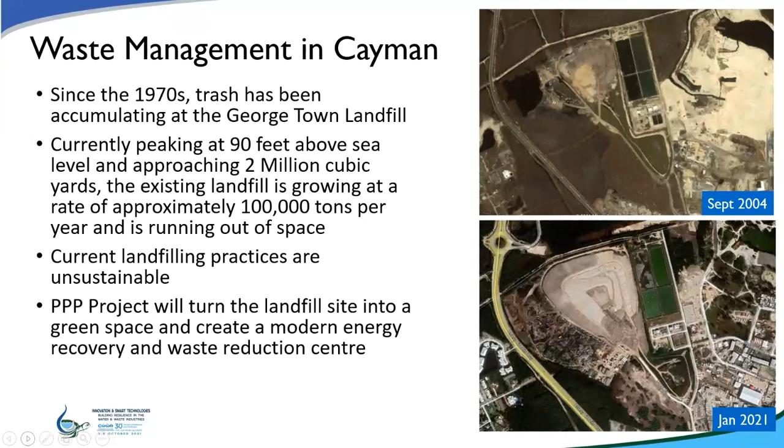The current waste management strategies on Grand Cayman include setting aside yard waste for mulching and separating scrap metals, including end-of-life vehicles, scrap, and appliances, for future processing and shipment overseas. Infectious and pathological wastes are incinerated through a batch-loaded starved air combustor with a high-temperature secondary combustion chamber. Plastics number 1 and number 2, fiber, glass containers, tin and aluminum cans are collected in dedicated containers at several recycling depots located throughout Grand Cayman near shopping centers and grocery stores. Still in its infancy, the recycling depots currently process about 1% of the waste volume for shipments to overseas recycling firms.

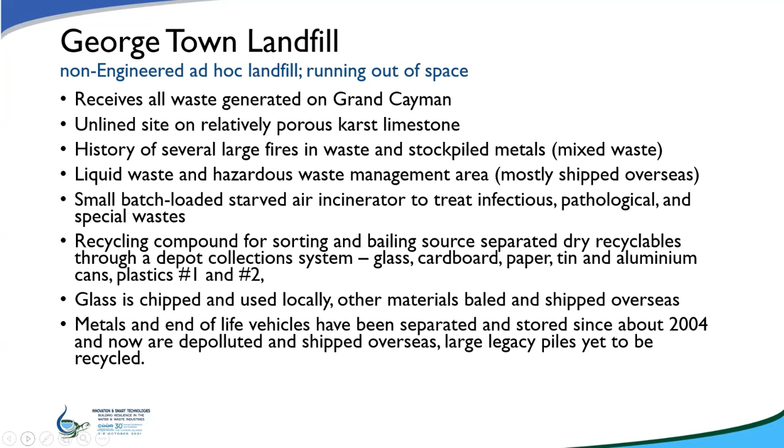When developing a waste management system, one cannot overstate the importance of sound waste volume and composition data. This is particularly true when developing a system that includes an energy recovery facility, since these facilities are designed based both on the waste tonnage and the calorific value of the waste. The government implemented a waste composition study in June 2018.

In the absence of potential third-party waste, optimizing the facility size for a 25-year contract period is difficult at best. A fine balance must be struck between short and long-term capacity with capex and affordability.

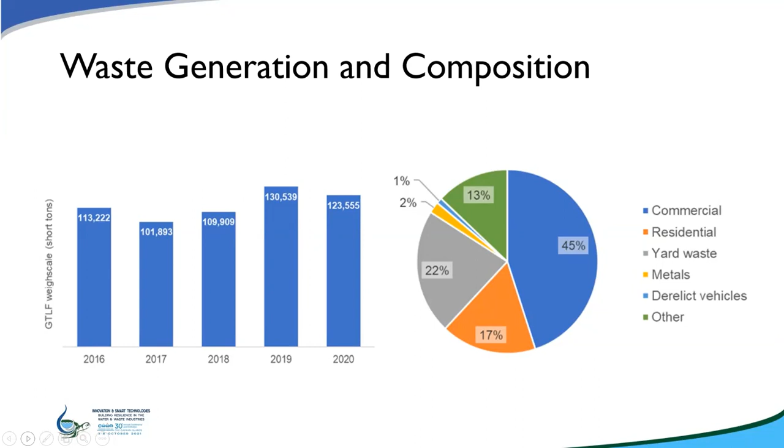The Cayman Islands government began to plan for a solution to waste management in April 2014 by writing a strategic outline case. This paper sets out broad policy directions and specifically identified the need for a national solid waste management strategy. This strategy had to be environmentally sound, cost-effective, and provide for balance between private sector and public sector services. A significant policy decision was made at that time to avoid searching for a new waste management site.

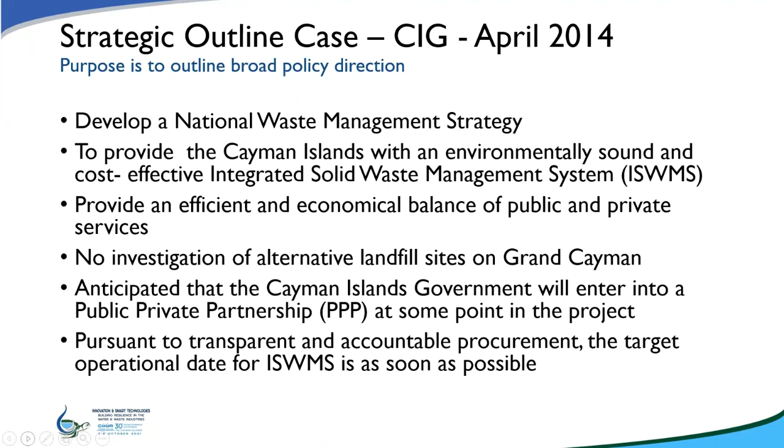Government employed consultants to assist in developing the national strategy, which included plans to follow the waste hierarchy, 4 R's before disposal, the 4th R being recovery of energy through waste combustion, and an engineered landfill. The inverted triangle represents waste management options from most preferred, waste reduction at the top, to least preferred at the bottom, which is landfilling or incineration without energy recovery. The strategy also considered a need to remediate the existing landfills on each of the 3 islands.

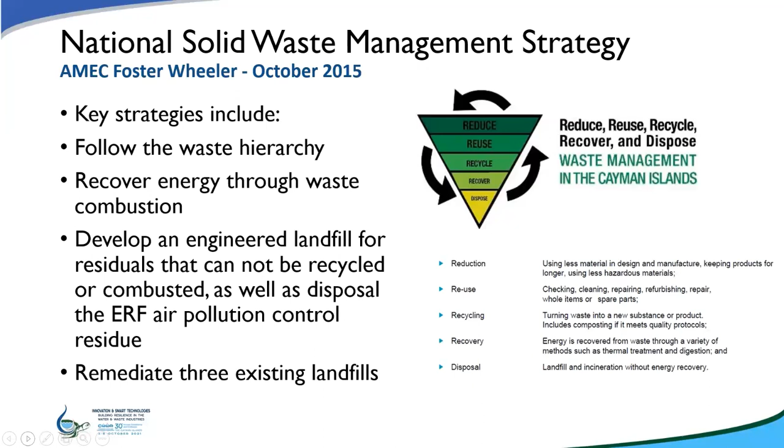The outline business case focused on a comparative analysis of alternative waste management systems that encompass the previously developed strategies. The resulting recommendation is a 25-year horizon, design, build, finance, operate, and maintain contract through a public-private partnership. The outline business case also recommends a competitive dialogue procurement procedure as the most viable.

Government entered the tender process in October 2016 by issuing a pre-qualification document. 3 interested parties qualified and were invited to participate in dialogue with government and to submit outline solutions in February 2017. After a brief preparation period, bidders were invited to submit final tenders in April 2017. 1 bidder dropped out, and so 2 final tenders were received for government's assessment.

A Decco consortium of waste management experts, including a local waste collection and recycling company and an experienced international energy from waste provider, was selected the preferred bidder in September 2017. The second bidder was held in reserve should the government and the preferred bidder be unsuccessful in agreeing contractual terms.

The path to deliver an integrated solid waste management system is long and not without pitfalls and hurdles. However, with commitment and input from financial, legal, and technical experts on both sides, after a little over 5 years, the parties signed an agreement in March of 2021. The target for reaching financial close is in the 4th quarter of this year. After that milestone, it will take approximately 3 years to complete detailed design, build, and commission the facilities.

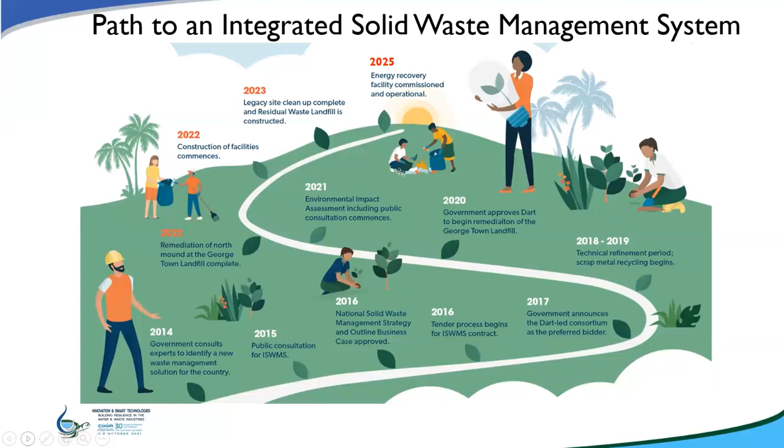The solution includes remediation of landfills on each of the 3 islands, transfer of recyclables and residual wastes from Cayman Brac and Little Cayman to Grand Cayman for processing, and diversion of up to 95% of waste from landfill disposal. Energy recovery on Grand Cayman will be the mainstay of the waste management facilities, and there will be 8 additional facilities to complement the ERF. Government has decided to manage the sister islands' waste and to deliver the recyclables and residual waste to the Grand Cayman facilities for both affordability and practical reasons. A public education program to support the new waste management strategy is an integral part of the solution.

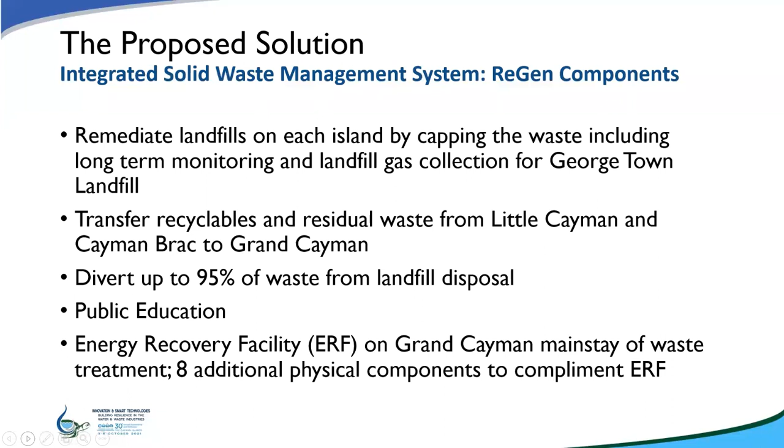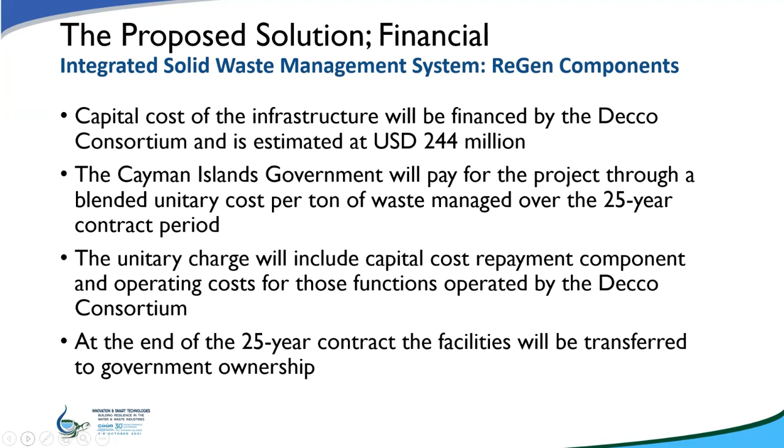One of the advantages of the design, build, finance, operate, and maintain strategy is that the Cayman Islands government will not pay for the new facilities until they are in operation, as the Decco consortium will finance the capital cost of approximately $240 million US. This capital and the operational cost of the facilities will be paid by the Cayman Islands government through a blended unitary cost per ton of waste managed over the 25-year contract period. At the end of the 25-year period, government will own the land and facilities, which should, in the case of the energy recovery facility, have an additional 15 years of life remaining.

Green waste delivered to the site as source-separated materials by the horticultural firms represents about 20% of the waste stream. This material will be turned into mulch or composted for agricultural or horticultural use. A household waste recycling center will include a reuse center and a bi-level container station for various recyclable and waste materials, including special wastes such as e-waste, oils, and batteries.

A medical waste incinerator, like the unit currently in operation, but with updated design and control system. The facilities operated by the Decco consortium include a C&D processing facility where materials will be separated and processed for recycling or energy recovery. Oversized materials that will not fit into the feed hoppers for the ERF furnace will be reduced in size at the C&D facility.

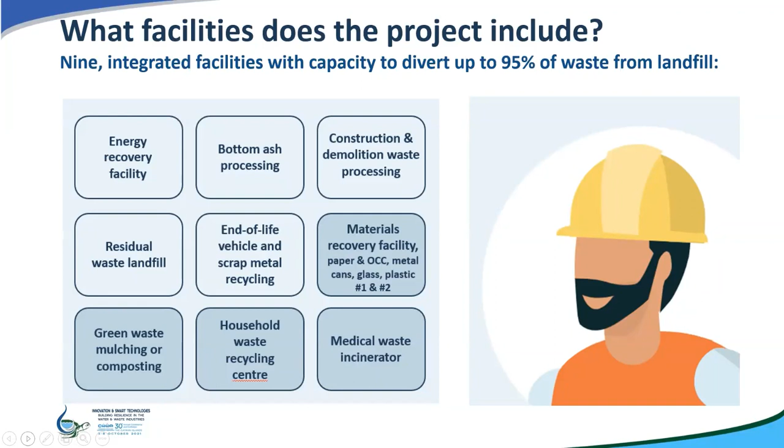As stated earlier, the Energy Recovery Facility, or the ERF, is the mainstay of the integrated solid waste management system. In this facility, the energy content of waste will be harnessed to produce electricity. The 9.3 megawatts of net electricity that will be sold to the local electricity utility represents about 10% of the power required by Grand Cayman and reduces the requirement of burning diesel fuel to produce this electricity. In this state-of-the-art facility, waste will be burned at high temperatures under strictly controlled conditions to assure complete combustion.

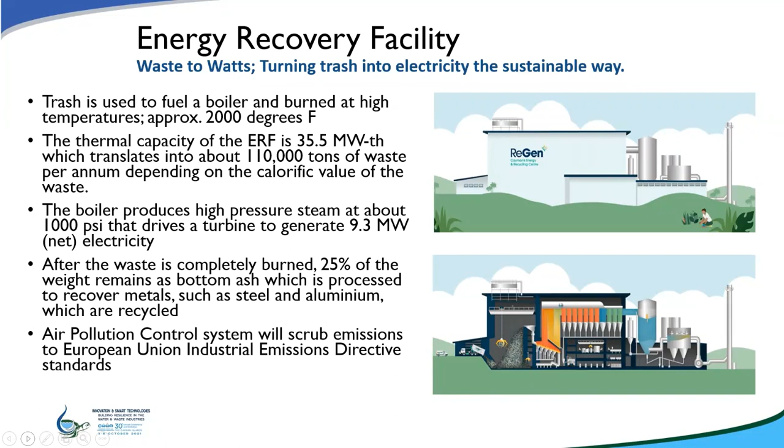The tipping hall is designed with 5 bays to avoid queuing of waste vehicles and assure a rapid turnaround time. The ERF is designed with a single stream from hopper to stack capable of treating about 13 to 14 tons per hour, depending on the calorific value of the waste stream. The waste pit acts as a surge and mixing chamber; the pit can hold approximately 5.5 days of waste deliveries in normal mode of operation. The system is guaranteed to operate a minimum of 8,000 hours per year.

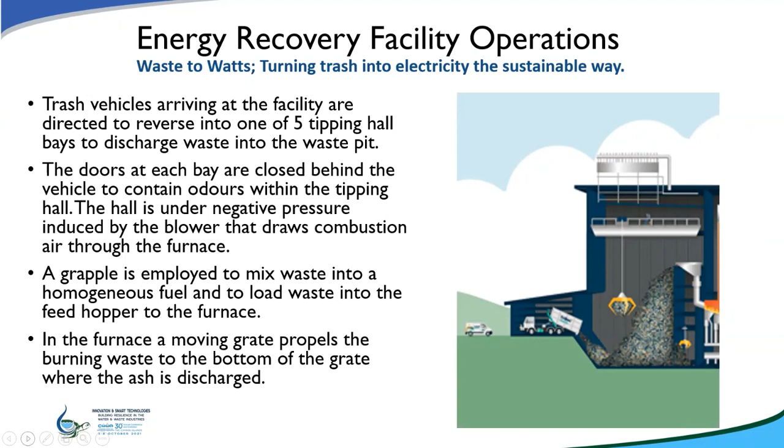Steam turbine boiler technology has been refined over nearly a century into a very robust and reliable system. The electrical generator that converts the kinetic energy into electricity is also highly refined. Converting the calorific content of the waste with a system capacity of 35.5 megawatt thermal into 9.3 megawatts electricity results in an overall net efficiency of about 26%.

A manner of utilizing the low-grade waste heat to increase the overall efficiency of the system has yet to be determined. The cooling system is comprised of several deep abstraction wells that provide groundwater for cooling and condensing the steam in the closed-loop boiler system. The water will be injected back into the ground at about 18 degrees Fahrenheit warmer into a different aquifer.

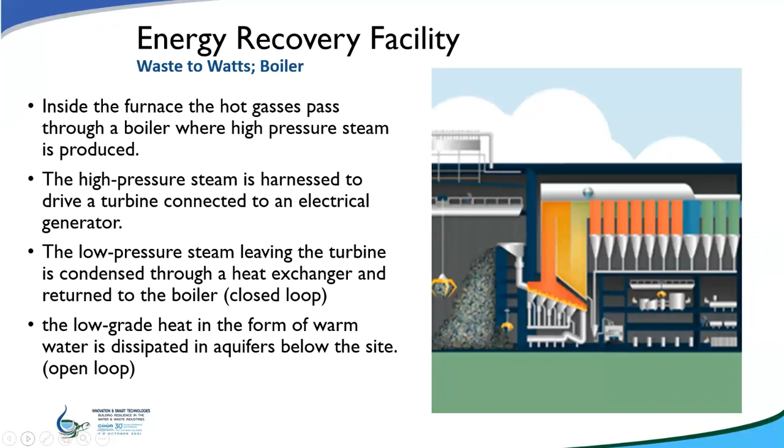Modern waste-to-energy facilities are a far cry from the toxic smoke generators of the past. According to the US EPA, toxic dioxin and furan emissions have declined by 99% from 1990 to 2005. Except for sulfur dioxide, which has a reduction of 88%, and nitrogen oxides at 24%, reductions of 95% or higher in emissions of mercury, cadmium, lead, particulate matter, and hydrogen chloride have resulted from the introduction of maximum achievable control technology regulations. Similar reductions in emissions have been achieved in the EU through best available technology regulations.

Due to the efficiency of the air pollution control systems, concerns regarding environmental impacts have shifted more to the management of the air pollution control residue. This material will be mixed with a slurry of cement and pozzolan. When the mixture sets, as in concrete, the contaminants are locked into the crystalline matrix. The mixture can be poured onto molds or simply onto the surface of the residual waste landfill for disposal.

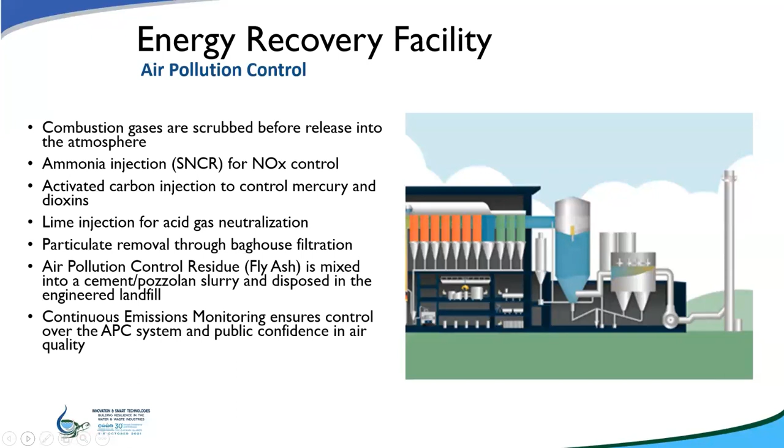To manage the risk of flooding, the elevations on site have been designed for the event of a 100-year storm. Sensitive and complex equipment will be installed with additional height above storm flood levels.

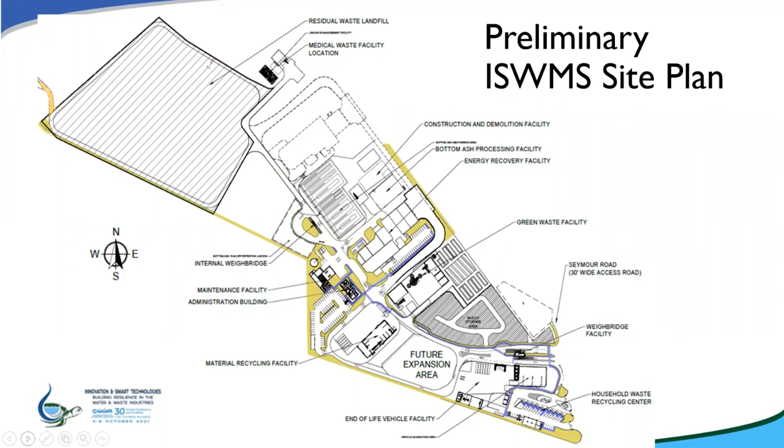An environmental impact assessment for the ReGen facilities is underway. The terms of reference is currently being finalized and work has commenced on the various disciplines that will be studied. Since the government has decided on the site location and technology as part of policy and strategy, the environmental impact assessment will focus on the potential impacts resulting from the 9 ReGen components in relation to the existing baseline conditions.

A somewhat separate but important component of the overall integrated plan is remediation of the existing landfills. Government decided to undertake remediation of the 2 small sites on the sister islands, leaving the George Town site to be remediated by the DART Consortium.

A landfill site environmental review commissioned by government in 2016 identified the environmental impact of the current sites. A Remediation Options Report looked at the various available methods to mitigate the issues identified through the environmental review. This report identified that capping, gas management, and environmental monitoring was the best solution to mitigate the previously identified contamination issues. A risk-based assessment confirmed that the solution identified would satisfy the environmental goals.

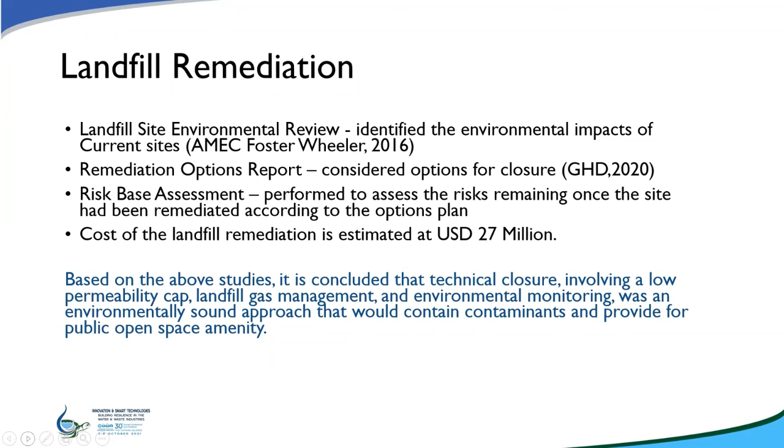A low permeability cap will reduce stormwater infiltration and thus leachate generation, leachate contamination of surface waters and groundwater, facilitate landfill gas collection, and provide a growing media for native species of plants. Ultimately, after a suitable period of settlement and stabilization, public use of the site as a local amenity is possible.

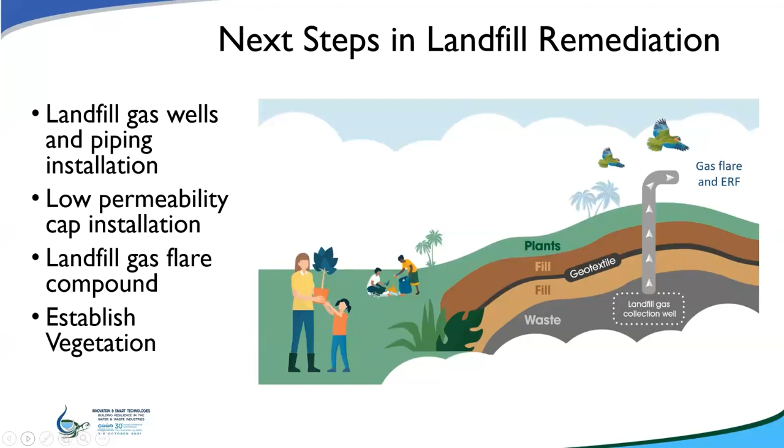The landfill cap design satisfies the Florida State Administrative Code for landfill closure. A total thickness of 2 feet will be placed in a phased fashion to ultimately cover the entire site. A test installation of about 4,000 square feet will be constructed within the fourth quarter of 2021. In addition to the layers shown here, an erosion control blanket will be installed on the surface in sloped areas.

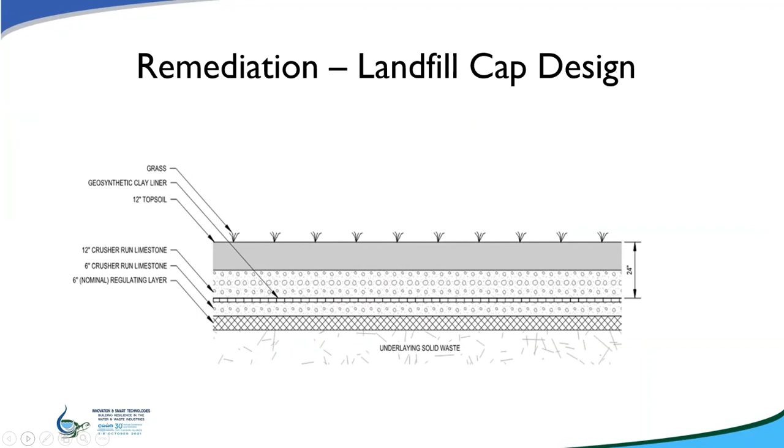Landfill gas utilization through the energy recovery facility is a win-win situation. Not only will this destroy the methane, a powerful greenhouse gas, but it also offsets the fossil fuel combustion required to produce the same amount of electricity at the electric utility. In addition to destroying the methane, capture of landfill gas will prevent any potential emissions of volatile organics and odors from the landfill.